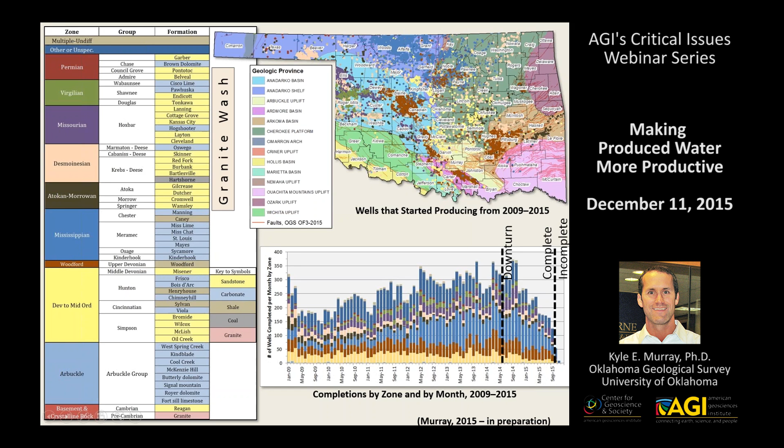So to set the tone there, we have those primary zones, those 10 primary zones that I organized the data into. What I want to achieve is to be able to estimate produced water volumes. Since they're not currently reported by operators, I have to find a method to estimate them. So I organized the oil production by zone, those same 10 zones, and look at the production over time in the chart at the bottom and in space in the map at the top. So what I'm showing here, I think, is fairly self-explanatory.

Production of oil in 2009 was primarily from the upper sandstone units, and maybe it was more conventional production at that time. But as we move forward in time, we have more unconventional production and dewatering and development of some of these carbonate-rich and shale-rich zones. So production from the Mississippian of oil certainly has increased as activity and completions increased in that zone. And then Woodford shale production, even though it's primarily a gas zone, there is oil production that has increased as well.

It's interesting to look at what occurred after the price of oil dropped. The production of oil also has decreased. So we have to continue to complete new wells and develop new wells to maintain the same level of oil production.

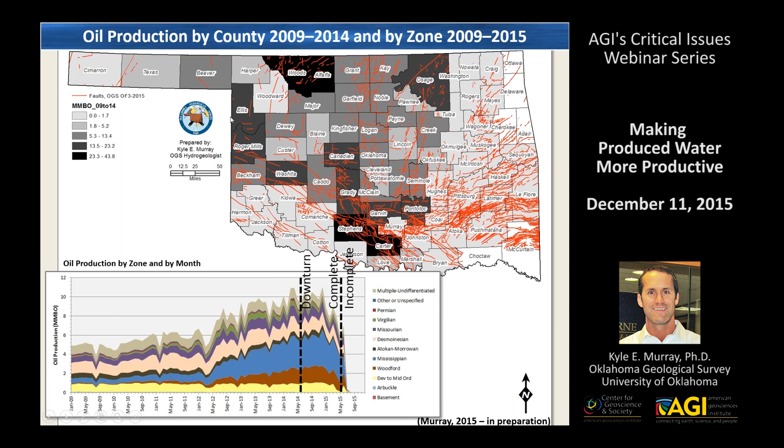If we look at the map view, you can see where oil production was at its highest at a county scale. Woods County, Alfalfa County, and Osage County, that's primarily Mississippian oil production. And then in the south, maybe Stephens and Carter County, the darker shades, would be a combination of Woodford, Devonian to Middle Ordovician, Simpson Group probably in that area, Springer and some other zones. And then the Granite Wash, those younger sandstone-rich layers would produce oil in western Oklahoma.

Gas trends look a little bit different statewide, and you can see back in 2009 we were producing most of the gas from the younger sandstone units, but over time the Woodford specifically has really been developed. So a lot of gas production from the Woodford. And the downturn in oil prices really hasn't affected gas production a whole lot. It looks like it's been pretty consistent since the price of oil dropped.

If you look at the map view, you can see the primary gas production zones are in the Ardmore Basin, the Arkoma Basin, and then in the Anadarko Basin in areas of Oklahoma where gas has been produced in recent years. Some gas production in the north from the Mississippian and other units. So what does it mean in terms of water production?

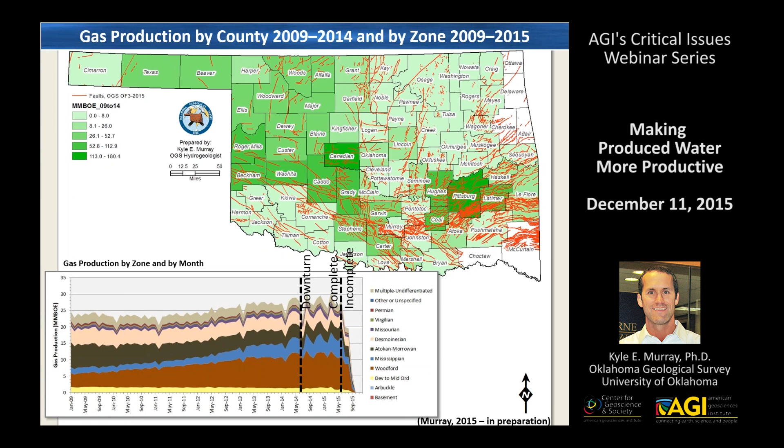The approach that I've been using to estimate produced water really starts with understanding which zones produce oil and gas, and then computing from initial potential tests and production tests a ratio of water to oil and water to gas, and then using that as a multiplier to estimate co-produced water volumes. So trying to achieve co-produced water volumes by a scientifically defensible method, this is the approach that I use.

What's shown in this foreground chart is the ratio of water to oil, and the inter-50 percentile, 25th percentile up to 75th percentile, with the median where the light color meets the dark color. So this is the ratio or the range of ratios that I would expect to see in a variety of tests that are done by zone. The median value is listed on the left.

So as a starting point, if I wanted to estimate co-produced water volumes, I could take oil production from a specific zone, multiply it by the median, and I would have a ballpark figure for produced water volume. I have the same data in the background here for water to gas ratios, and again, apply the same methodology. So what I've done in recent weeks is try to refine this methodology and calibrate produced water estimates to the saltwater disposal volumes that I've been tabulating over the same period of time.

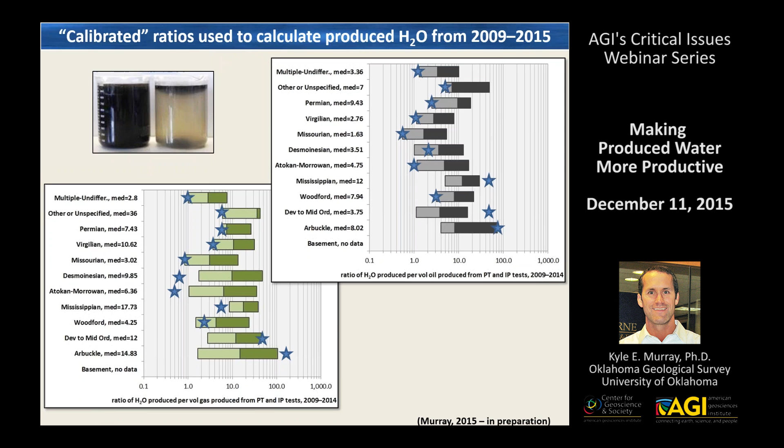So that tells me that based on this approach, the produced water volumes will be much higher in areas that are producing from the Mississippian and the Devonian to Middle Ordovician. So that plays itself out pretty clearly in this slide, which shows again the time scale or temporal scale in the bottom in the chart. Back in 2009, our production from the Devonian to Middle Ordovician really generated the majority of the produced water.

As the production shifted to Mississippian and still included Devonian to Middle Ordovician, the water production from the Mississippian certainly increased and became the majority of our produced water. After the downturn, the oil prices change. That affects water production as operators shift from maybe water producing zones to lower water producing zones. And we see an estimate of produced water that's also declining in recent months.

So in map view, you can see the summary: Woods County, Alfalfa County, major water production zones. That's Mississippian production. And then in central Oklahoma, Oklahoma County, Lincoln County, Seminole County, that's where we have a lot of Devonian to Middle Ordovician production and probably Hunton dewatering activity that's associated with that.

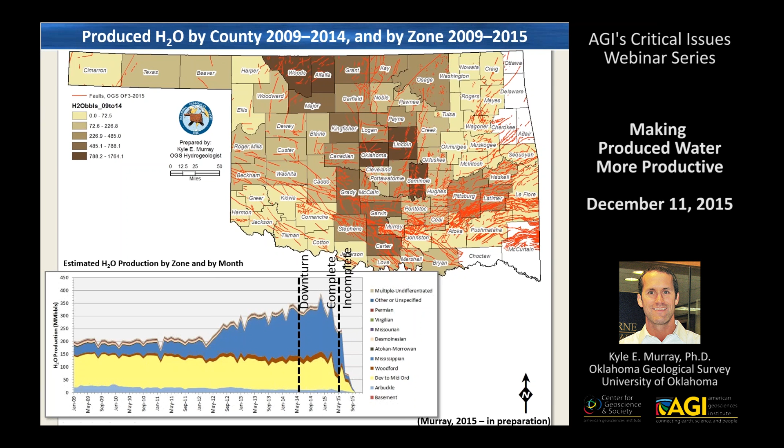So what do we do with produced water once it comes out of the ground? This is a portion of a diagram that I've drawn that shows flow of water through the oil and gas sector. And this is the portion that I'm talking about today, produced water. In many cases, operators are treating it to clean brine and reusing it for frac jobs and additional drilling and completion. In other cases, we may use it for enhanced oil recovery and water floods, which you saw in this diagram to the bottom. But today I'm going to wrap up my talk with where does the water go and into saltwater disposal wells, specifically in Oklahoma.

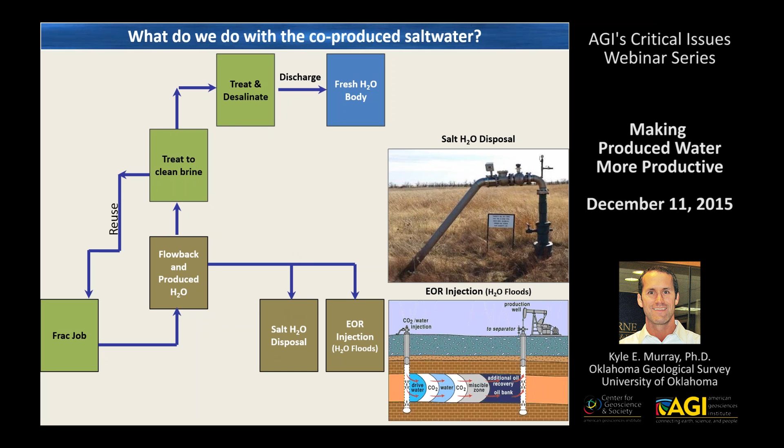So produced water is largely generated, it seems, in the Mississippian Play in northern Oklahoma and Devonian to Middle Ordovician group in central Oklahoma, with some other pockets of high water production. But where does it go back into the subsurface in saltwater disposal wells? The same zones that I showed earlier, now showing saltwater disposal, and the dominant zone for saltwater disposal in Oklahoma is the Arbuckle. So we take water out of the Mississippian, Devonian to Middle Ordovician primarily, and then it goes back into the Arbuckle.

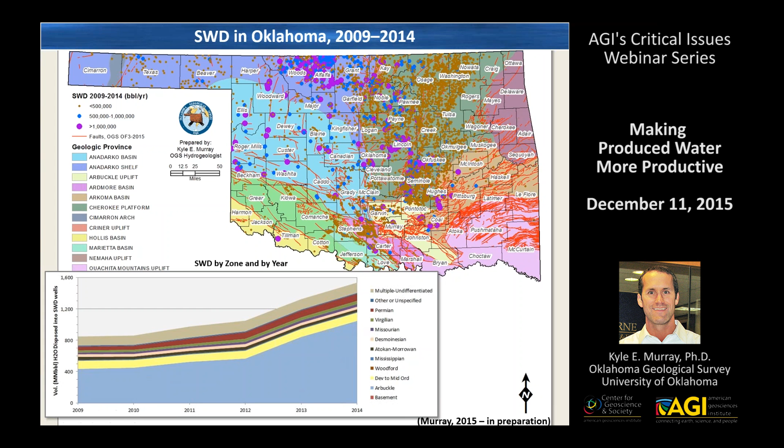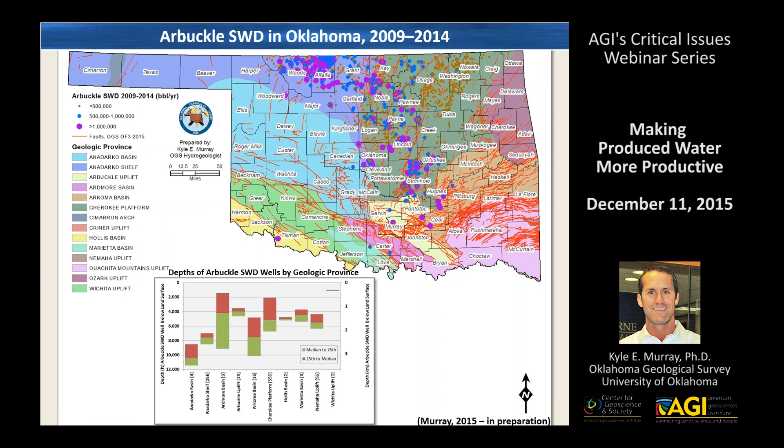And so because the Arbuckle is so overwhelming in terms of the volume of saltwater disposal, I'd like to look at that as a separate slide and show you the distribution of Arbuckle disposal wells, which are mostly in the Anadarko Shelf region or province and the Cherokee Platform geologic province. In other areas, the Arbuckle is either very deep or not present. So the Arbuckle disposal wells really correspond to zones that I've estimated to have the highest produced water volumes. So the increase in produced water volumes over time do correlate pretty strongly with the increase in saltwater disposal into the Arbuckle.

To wrap it up, I have a few take-home messages for you. Dewatering in Oklahoma seems to yield more produced water than unconventional shale development. The Woodford Shale is obviously a prominent gas-producing zone, but it's not a big water producer. Our water production really comes from those carbonates. And the rate of water production, I think, is strongly related to the market. So oil prices drop, operators will move away from water, essentially.

To allow for us to improve our ability to recycle and reuse water, we do need some regulatory controls and help and innovation. So pooling is one of the strategies that we really need to begin to adopt here in Oklahoma. And if we want to use or reuse water outside of the oil and gas industry, desalination is one of the requirements. That salty water needs to be desalinated and reused elsewhere. And in terms of saltwater disposal and how we manage that resource, the cost is really largely a function of how far we move the water before it's disposed. So the operation and maintenance cost really is tied up in transport of that water.

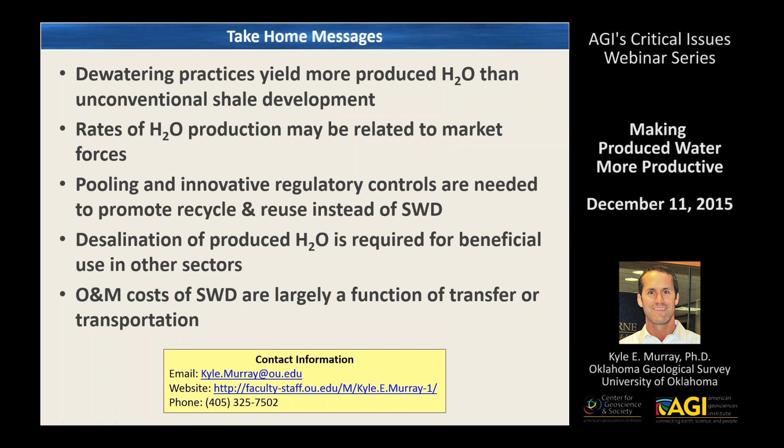I'm a senior attorney on the oil and gas team at the Environmental Defense Fund. EDF is an international environmental nonprofit with about 1 million members worldwide. And we're science-based and, where possible, advocate for market-based solutions to environmental problems. My area of focus is oil and gas, and this presentation will cover a brief overview of the risks associated with reuse of produced water and emerging regulatory responses.

There are big opportunities here, and with that come some fairly significant risks as well. Reusing oil and gas wastewater makes a lot of sense in theory. We produce 800 billion gallons of wastewater from oil and gas operations every year. And in some arid parts of the country, recycling the wastewater could reduce pressure on freshwater sources. But this comes with a big caveat. Recycling itself isn't easy, and it doesn't always make economic sense, and it's certainly not risk-free.

So before we jump into infrastructure and systems that incentivize recycling, we need to make sure we're not causing more problems than we solve. There are two sort of big categories of risks associated with recycling that I'll introduce today. The first is risk of spills and leaks of minimally treated water. And the second is uncertainty about the constituents in the wastewater, how to analyze them, how to treat the constituents, and how toxic they are to humans, aquatic, and terrestrial systems, like plants, bugs, and soil.

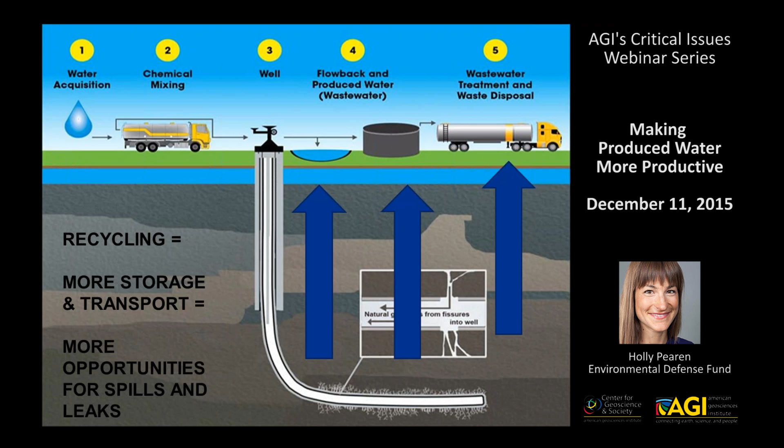And so this risk isn't speculative, right? The amount of wastewater spilled from oil and gas operations is increasing, even though production is declining. Even though spill data is incredibly difficult to obtain, the states that do collect and make transparent their records show more and more spills. Data compiled by EnergyWire shows that the national spill rate increased in 2014 by 17%.

And the New Mexico Legislative Finance Committee compiled data for the state of New Mexico in 2014, and their data showed that the volume of wastewater and fluids associated with oil and gas operations increased by 61%, while the rate of oil production increased 23%. And I think part of this could be explained by the increasing trend to keep water at the surface longer and move it around more, which creates opportunities for leaks and spills in tanks and pipelines and pits.

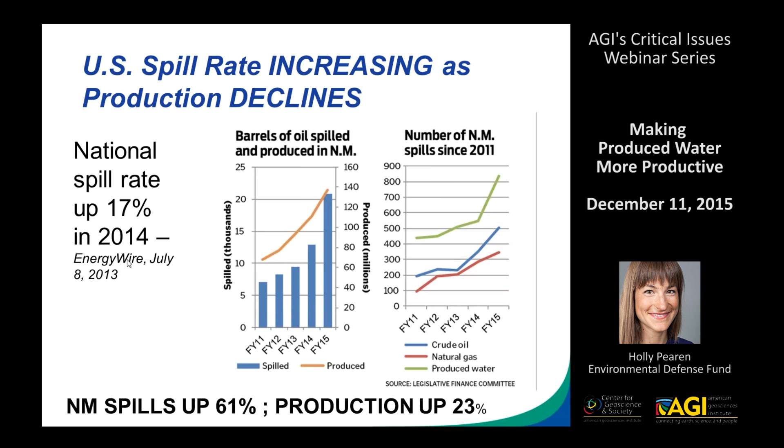So states have responded to the demand for recycling with new regulations that make it easier to reuse water. This first wave of recycling regs streamlined permitting for pits, tanks, and recycling facilities, which is somewhat counterintuitive if you're worried about leaks and spills without good enforcement and robust requirements initially for design and construction.

States like Texas and New Mexico passed rules that specifically encourage recycling and make it easier to do by authorizing it and approving certain infrastructure if it meets certain specifications. And I'll note that North Dakota, Ohio, Colorado, New Mexico, Texas, they all have rules that specifically apply to saltwater, produced water, or recycling facilities. But I'll use Texas as an example. It was the first recycling rule per se, and it's been somewhat of a template for the recycling rules that followed.

And under Rule 8, you don't need a permit to construct a pit used in recycling operations as long as the pit meets certain standards. It must be lined. You must have 2 feet of freeboard. Single-lined pits must be emptied annually and inspected, or you can use a double-lined pit with leak detection, among a couple other things. And these are fairly good. Leak detection and repair and inspection, particularly on a regular basis.

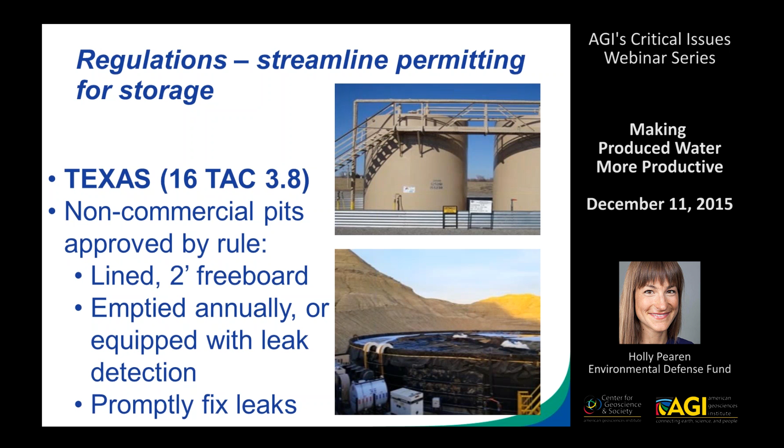Another emerging trend is a set of specific regulations pertaining to pipelines that transport oil and gas wastewater. North Dakota's legislature just passed a bill last session, HB 1358, requiring operators of buried wastewater pipelines to submit a bond and certain maintenance, operation, construction, and design information to the NDIC. They also directed EERC, the University of North Dakota's research arm, to study wastewater pipelines and the cost efficiency of leak detection and repair. And that report was published last week, and I'd encourage you all to take a look at it. They did a good job.

And another pipeline regulation that we might see emerge is in Pennsylvania. Their DEP included pipeline regs in the draft Chapter 78 rules. And those draft rules contain a lot of really interesting protective conditions, such as daily inspection while the pipeline is in service, and shutoff valves that would limit spills to 1,000 barrels.

The other big area for reuse of produced water, or I should say interest in produced water, at least in the West right now, I know Jeri will talk about some other non-traditional uses, is reuse for things like de-icing, agriculture, and wildlife. Some of this is facilitated in the West by an exemption to the statutory prohibition on discharge of oil and gas wastewater, 40 CFR 435 subpart E, that allows discharge of wastewater west of the 98th meridian if the water is of good enough quality for agriculture and wildlife. And that's a direct quote from the regulations, of good enough quality for agriculture and wildlife. The problem is how to define what good enough means.

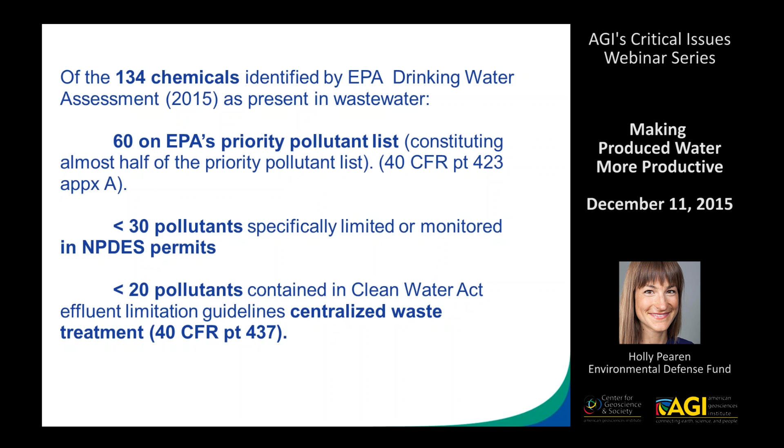According to our analysis of the 134 chemicals identified by EPA's drinking water assessment as being present in oil and gas wastewater, less than half, 60, are on the priority pollutant list, which forms the backbone of many environmental protection regulations. On average, less than 30 are contained in NPDES permits, typically issued for industry facilities. And less than 20 are on the effluent guidelines for centralized waste treatment facilities, the commercial treatment facilities that typically receive oil and gas wastewater.

Irrigation or agricultural water quality standards don't address these oil and gas constituents either. Typically, standards published by FAO, USDA, and Extension Services address TDS through chlorides, SAR, EC, and general water quality parameters like pH, boron, and nitrate concentrations, and a host, about 20 inorganic constituents based on observed phytotoxicity. These are some of the examples you might see.

There's a real gap here in the research and standards. There's an immediate need for additional research into chronic toxicity of many of the constituents found in produced water, and not just for human toxicity. Plant, soil, terrestrial ecosystem impacts, how some of these constituents persist in soils and sediments, bioaccumulate, and their effects on bugs and fish, and fate and transport generally in the environment is critically important to inform beneficial use.

And this is particularly important now because previously the salt content alone of many of these alternative water sources would knock those sources out of contention. But current treatment capabilities are becoming more economically feasible, and the TDS can be removed, but many constituents may remain. And those remaining constituents may or may not have known toxicities, and may or may not, but most often do not, have regulatory limits.

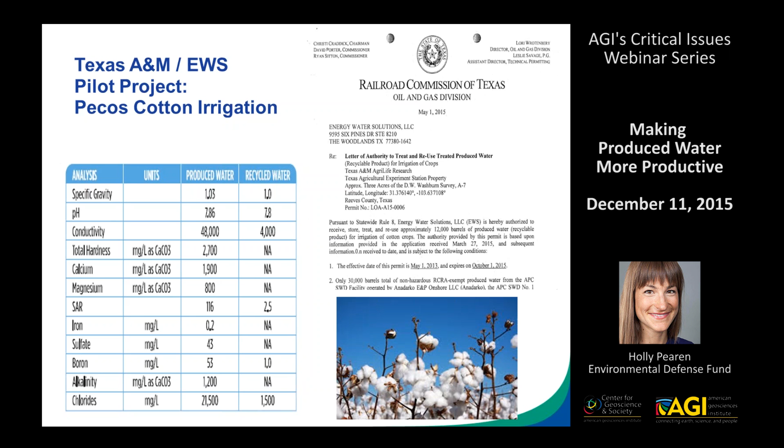And the list of analytes that Texas A&M tested for is up on the screen. And I understand that the main limitation on this analyte list might have been funding. They had no outside funding for this. So there's a real opportunity to expand research in this area to evaluate things like organics or perhaps a whole effluent toxicity analysis.

New Mexico's rule is very similar to Texas's Rule 8. The Oil Conservation Division in New Mexico passed a rule last March that encourages recycling similarly and streamlines permitting and regulations pertaining to recycling and recycling infrastructure. New Mexico's rule authorizes by rule recycling for downhole uses and states that other uses will be permitted after a case-by-case evaluation. The rule also specifically calls out pilot projects with favor, I would add, and will allow these after review by the division. So clearly they're forward-looking in this regulation.

Wyoming is a great example of how these states are addressing this potential reuse very differently. Wyoming's Department of Environmental Quality issues permits for discharge to the surface that consider the subsequent beneficial use. So Wyoming has a long history of discharge of oil and gas waste based primarily on the prevalence of coal bed methane wastewater in the Powder River Basin. However, DEQ also has a specific permit application that addresses discharges of other types of oil and gas wastewater.

As part of the application to discharge to surface waters, new applicants have to certify that the water will be beneficially used for agriculture or wildlife. Part of the permit analyte list is copied here. Applicants for this permit must test their discharge and keep it below these established limits, which I'll mention don't necessarily include some of the things we would expect to find in produced water.

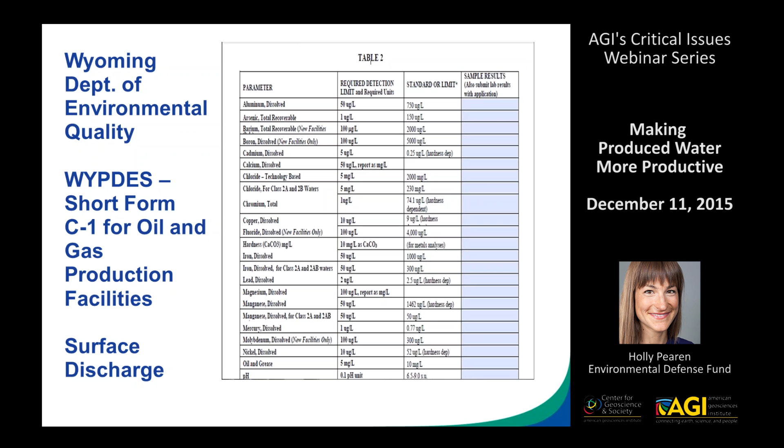So after identifying some of the risks and the regulatory responses, I think the takeaway is really to proceed with caution on this one. Regulations in many states lay the foundation for recycling and beneficial use of produced water outside the oil field, or at least projects that will explore this potential reuse.

The question is, will the permits and the regulations, the new regulations, contain terms and conditions that are sufficiently protective of human health and the environment, even though it's still unknown exactly what pollutants are in the water, how they can be tested and treated, and then exactly how toxic the constituents may be to humans, plants, soils, and aquatic ecologies.

I want to clarify that recycling and reuse does show a lot of promise in theory, and the purpose of regulations really isn't to obstruct this potential, but it's essential to proceed with caution, because we're only going to exacerbate water shortages if we pollute existing freshwater supplies. And we certainly don't want to trade one environmental problem for another by moving too quickly.

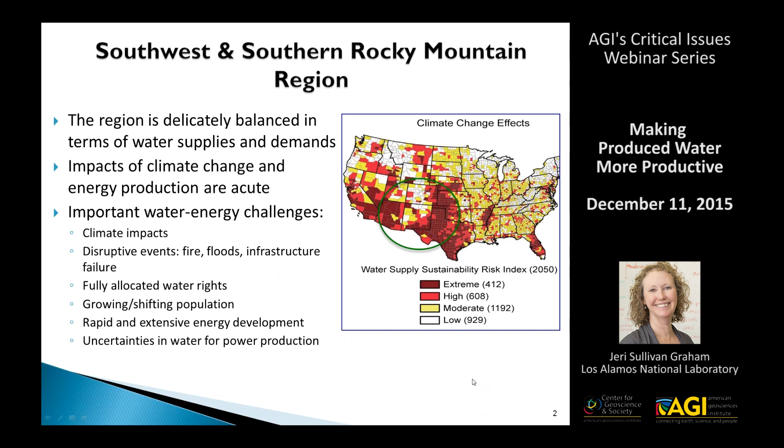And I'll note this list is a list that I've put together not only for produced water, but for brackish water. Both of these kinds of resources are like a square peg in a round hole. They don't fit well with our traditional concept of using fresh water and treating fresh water, delivering fresh water for use. Fresh water is our very easy water resource to implement. However, these more complex waters and more saline waters are going to be more difficult. It's going to take more effort in terms of looking at infrastructure, safe use, and regulation.

So one of the most important things is availability. Is the water in the right place at the right time at the right volume? Oil and gas fields are not always located where population centers are, for example. Treatment is a big thing. It's going to be expensive. There are metals, suspended solids, scale-forming minerals, biological constituents, and organic compounds that we'll need to pay attention to and probably remove depending on the use.

There's also questions about liability, risk perception, and use acceptance. Who owns the water? Does it belong to the surface owner or the mineral rights owner? And who bears the liability if something undesirable like a spill happens? There may be skepticism in terms of human uses like irrigation. Holly was talking about this. We could even say drinking water. What if we took this to drinking water standards? It is possible, but it's probably way too expensive, and there's likely to be questions.

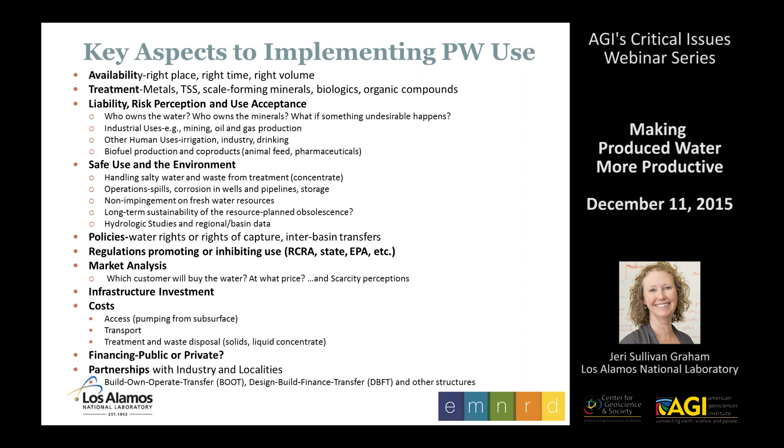Infrastructure investment: we will need somewhat different infrastructure to prevent spills. This incurs more costs. There's, of course, transport, treatment, waste disposal, et cetera. And then how do you finance this, either public financing or private financing or with partnerships? So there's a lot of things that will need to be considered. There's a lot of moving parts.

In New Mexico, we've been looking at the regulatory framework for reuse, and Holly gave a nice start to this. On the left-hand side of the screen, I've shown the areas that are under the jurisdiction of the New Mexico Oil Conservation Division. And as Holly mentioned, we have new regulations for recycling and reuse. As long as this water stays within the oil and gas production and operation, there's no permit needed, although there are specific requirements. You can treat this water and put it back into the system. The waste disposal process also stays in the system, and uses case by case are also able to be considered.

However, once we treat this water or move it over into the freshwater regime, which is governed by our state engineer, then we start looking at a completely different regulatory system. We have water rights and water permits that are important. And of course, if there's a spill, our environment department takes over and has jurisdiction there. And again, the liability issue comes into question. So there's a lot of things along that fuzzy dividing line down the middle that will need to be looked at and better defined so that we can use these waters.

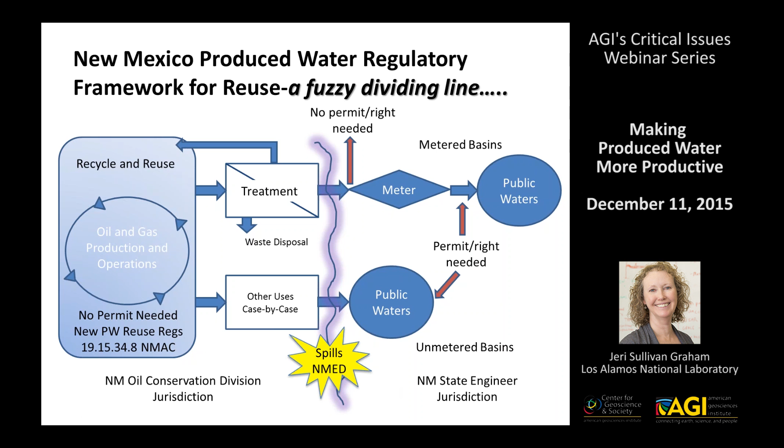Some alternative uses for produced water. As I mentioned, reuse in oil and gas production is a really logical place for produced water to be used. There's a clear regulatory pathway. Hydraulic fracturing is reusing produced water quite a bit right now. And there's also some other examples. I'll bring up one about steam flooding that's being done in California in some of the oil fields there.

Irrigation is one that's always brought up. I hear this all the time. After treatment or dilution, irrigation is a potential use for produced water. I will show an example of rangeland rehabilitation, some work that was done at Los Alamos and Sandia with some small businesses several years ago in northern New Mexico. And then, of course, the most recent study on growing a non-food crop, which is cotton.

Algal biofuel production is something we've looked at as well. This is an interesting and somewhat new way to look at using produced water. It's like new energy versus old energy. And then another example might be potash mining. This has been proposed but is not yet enacted in New Mexico.

However, I'll note that solution mining using saline water is a very good way to extract potash. Right now they're using brackish water. The alternative would be that they would use fresh water with added salt. And so we prefer that they use water that's already salty rather than taking up fresh water. So it's a potential good use of produced water if we can get the quality issues resolved.

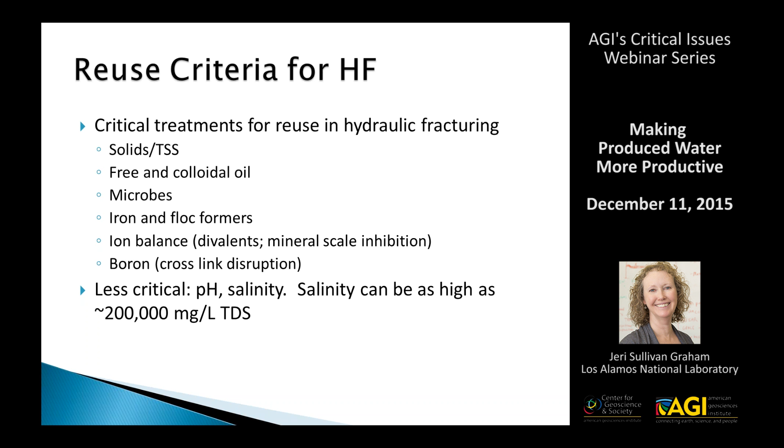Iron and floc formers is very important. Need to get the iron out. Ion balance is also important both for formation interactions and mineral scale inhibition. And then boron is a problem for the additives they use during fracturing. Less critical is pH and salinity. Hydraulic fracturing processes now can utilize very high salinities, which is a good thing because salt removal is very expensive.

There's a number of treatment options that are out there for saline waters. I won't get into this a whole lot, but bear in mind that membrane methods are usually the most common methods we know of. They are usually used for seawater. That's the type of desalination that we know the best.

Always bear in mind that there is a concentrated waste that must be disposed at a cost when you do a separations process like a membrane method or a thermal method. You will have some fresher water, but you also will have a waste. And so when you're inland, that means injection for disposal or perhaps evaporation ponds.

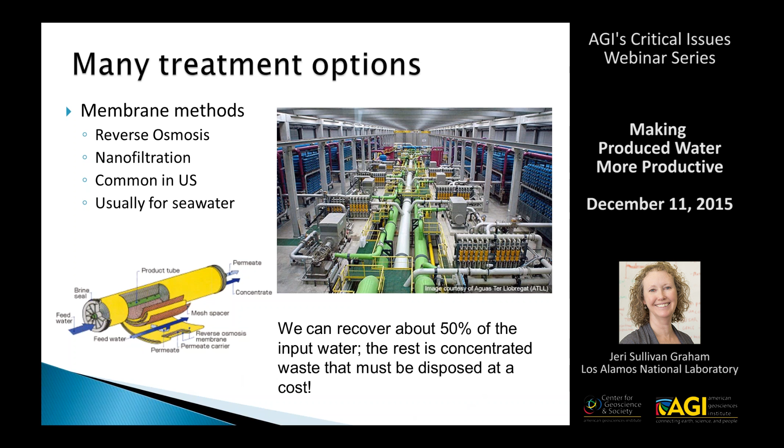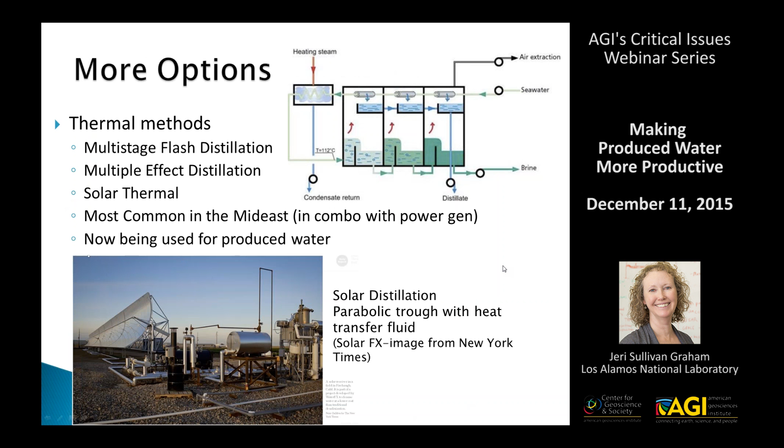Thermal methods are starting to be used more frequently. This is just a fancy way of boiling water, essentially, making sure that we control the heat and the thermal processes. Solar thermal is something that's also a potential new way for separating fresh water from saline water, and it is being used for produced water. Again, you also have a concentrated waste that you're going to need to dispose ultimately.

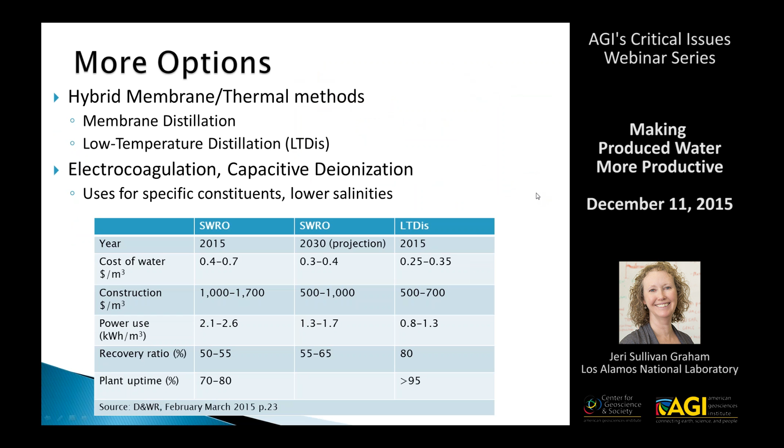And then there are some hybrid methods, membrane distillation and low temperature thermal distillation. Some of these have some improving cost profiles, which is a good thing. Also, electrocoagulation and capacitive deionization are possibilities. However, they're most useful for specific constituents or lower salinities. And I could answer some more questions about these methods, but we'll keep moving along.

I want to thank Kent Adams from BOPCO. They recently did a study where they looked at the costs of freshwater consumption versus produced water consumption, both with treatment and without treatment, for a frac job. Their goal was to retain 100% of the produced water and retain the efficiency of their cross-linked gel so they could extract more gas. Freshwater has a cost, and in this case, they did not need to utilize fresh water, so that eliminated that cost of $250,000.

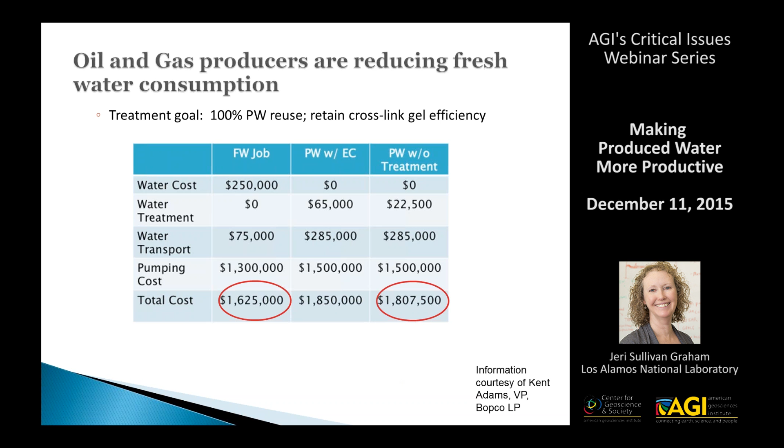They decided to try some treatment. Electrocoagulation was more expensive. They also did some just basic filtration, which was less expensive. Water transport costs were where the biggest cost was incurred, as well as pumping. So those are not necessarily something you think of immediately as a key for cost, but when you look at the final bottom line, the costs are not that different, and so reuse without treatment and without using fresh water is a very feasible option.

Steam generation and aquifer recharge is done right now in San Ardo field in California. This is a heavy oil field. They are using reverse osmosis treatment to create water that is both discharged to basins for aquifer recharge and then for a steam generator, which has very high quality requirements. They're getting 75% recovery while reducing total dissolved solids and boron.

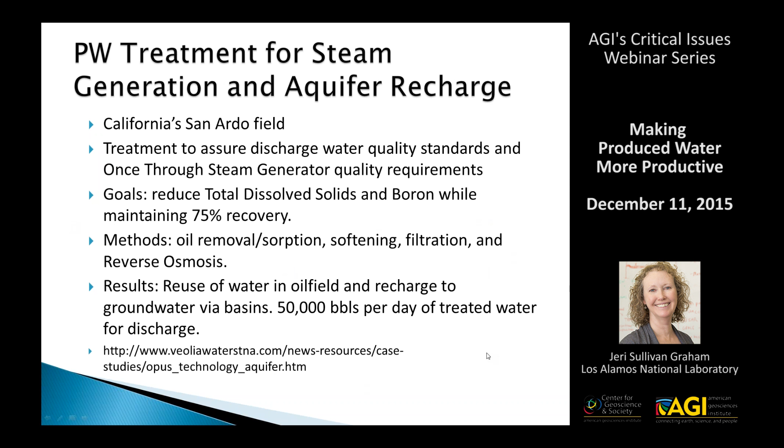They have a fairly complex process with oil removal, softening, filtration, and RO. So ultimately, they're able to retrieve 50,000 barrels per day of treated water for discharge. And I've got the reference here if you're interested in looking this up. Veolia is the company that's doing the work.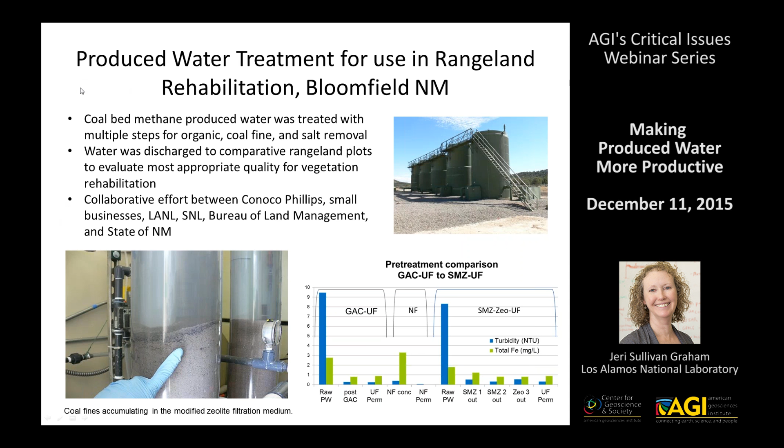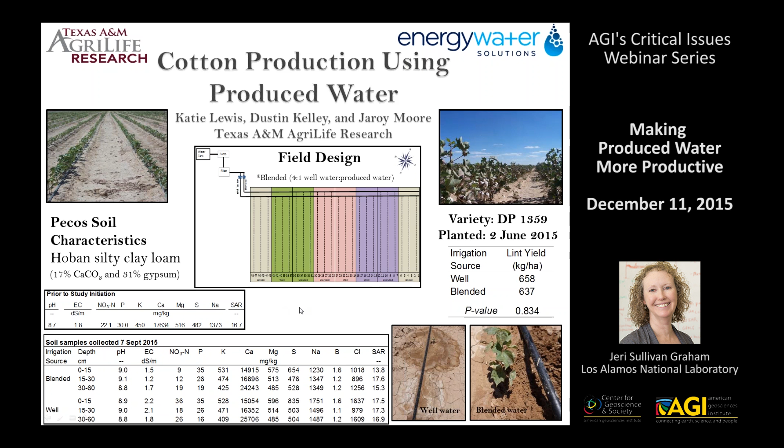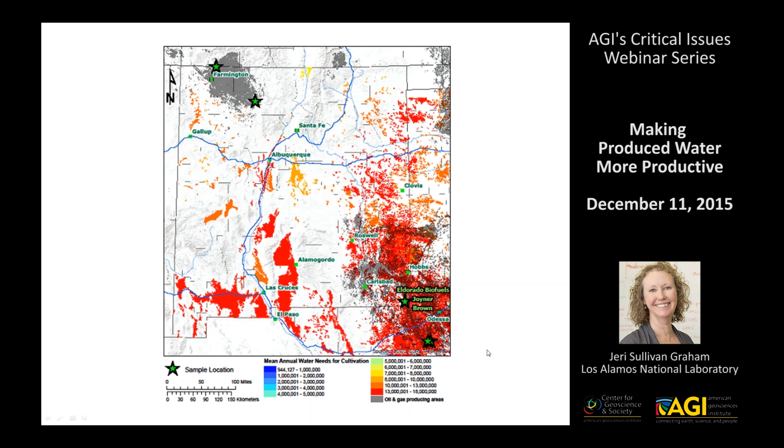So the water needs are highest, of course, where the red is. We took a number of samples from different wells in different parts of the state, ended up doing some work down in the southeast corner with the folks at Eldorado Biofuels. And what we found is that we could take produced water, we could treat it using a multi-step process.

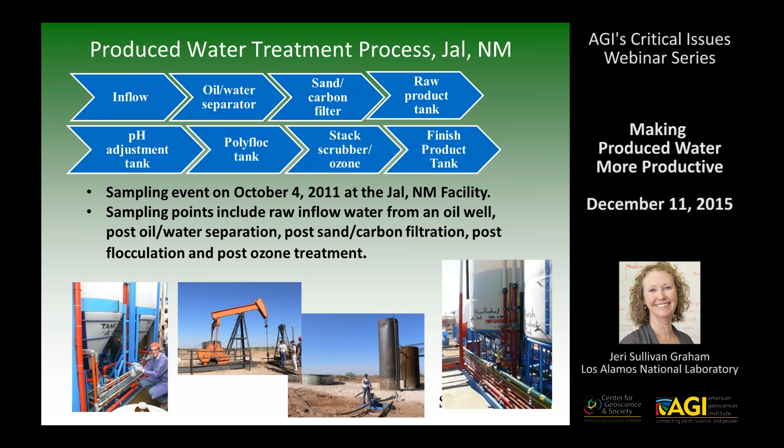This did not need to have salt removal, but we did some organics removal and reduction using filters, oil water separator, and stack scrubbing. And ultimately, we were able to use produced water for lab, pilot, and also some field scale tests. And we had good recovery of algae and biofuel. We did find that high salinity tended to reduce our growth.

And we also got very good quality when we started looking at additional uses of the algae for stock feed, for example. So the algae grown in produced water was just as good as algae grown in fresh water once we harvested it and took a look at it. So a lot of possibility there.

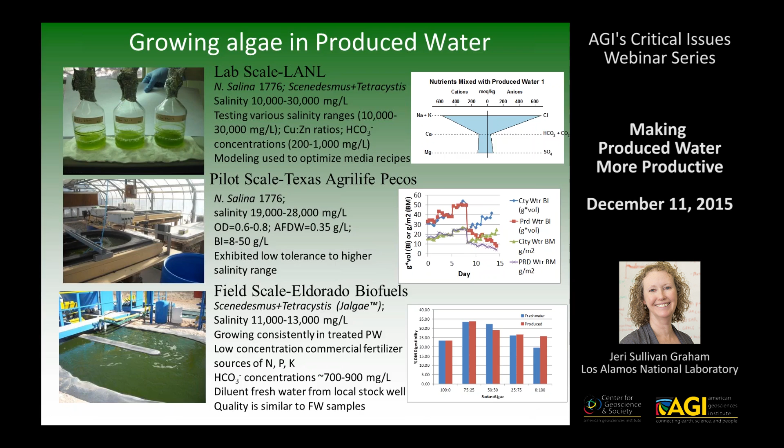Next up is our panel Q&A session. Our first question is that, Kyle, in your talk, you mentioned that you can have more produced fluid than you actually get back oil. Is that the case in all places, in all states, or is that a rarity for Oklahoma? I think there are some parts of Oklahoma where there's more produced oil or gas than water, but I think that's pretty limited. It's mostly, I would guess, the Granite Wash region in western Oklahoma, where they're more conventional sandstones. But I would imagine that the ratio of water to oil or gas is probably greater than 1 in most parts of the country, and absolutely in most parts of Oklahoma.

Great, thank you. The next question we have is, can these reuse methods discussed for produced water from oil and gas be used for produced water from other processes like wastewater treatment and other industries? Yes, indeed. Actually, produced water treatment often borrows from methods developed for other uses. So, for example, removal of organics using activated carbon or gas flotation. These are methods that have been developed for industrial uses already.